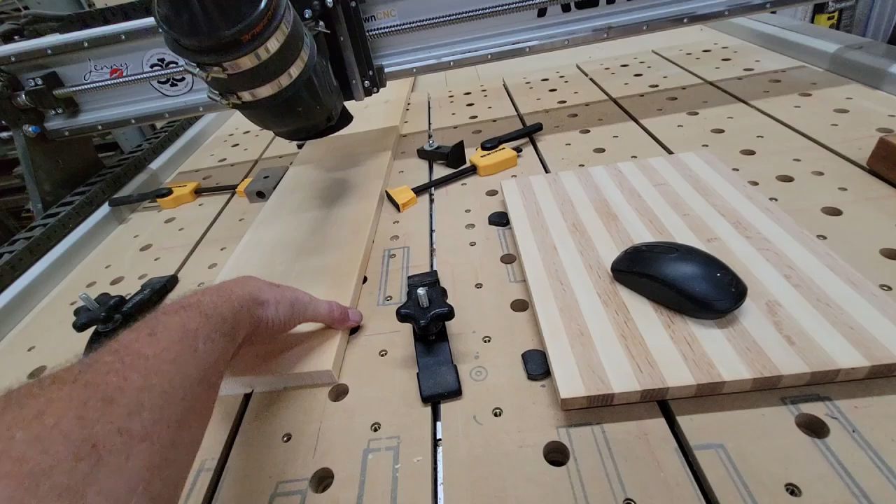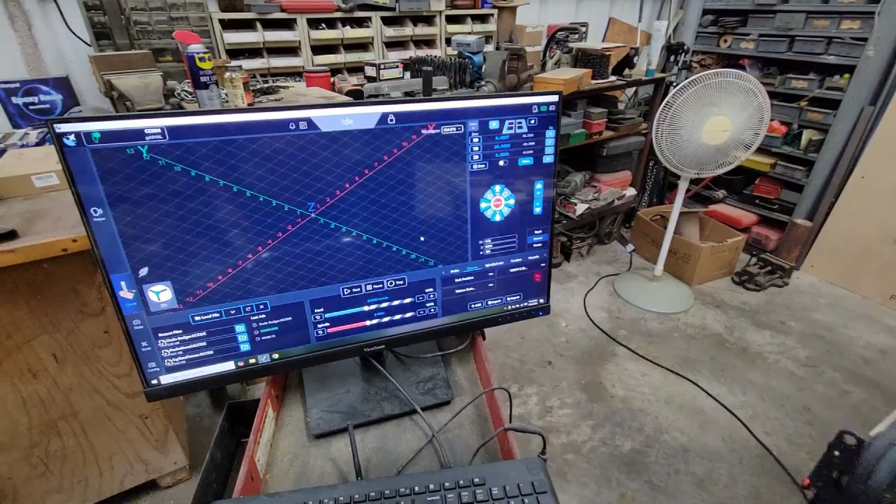The reason for that is because the tool, I just had a line drawn into the, I had a vector drawn. Let me show you in here how I did this. I really just had one long board in here, and I had just got it against these stops, set a 0 here, clamped it here and there, and then I just milled that out. It's not a big deal, and got my control right here.

Let's go back in the software and figure out why. I know what it did. As soon as it did it, I could see that I overlooked something that I should have been paying better attention, because it came in and milled this end off just like this. So that's a climb cut.

You see an end mill here to use for an example. Here's a rougher, which works good for this kind of work. So I came in here, you know, you're turning clockwise, you should be going this way. That's a climb cut. After it made that cut like that, I noticed that it went down here, and I'll go, crap, why is that doing a conventional mill cut right there? So it's doing that cut, and I know exactly what it did.

It thinks it's on the outside. I had drawn that as profile outside the line. So it was outside of this line, but it was inside of this line. That's why it made it. And I was using a 1/8 end mill that's still in here. I was using the Badger. And so it was actually on the wrong side of the line. And to fix that, you need to change your start point.

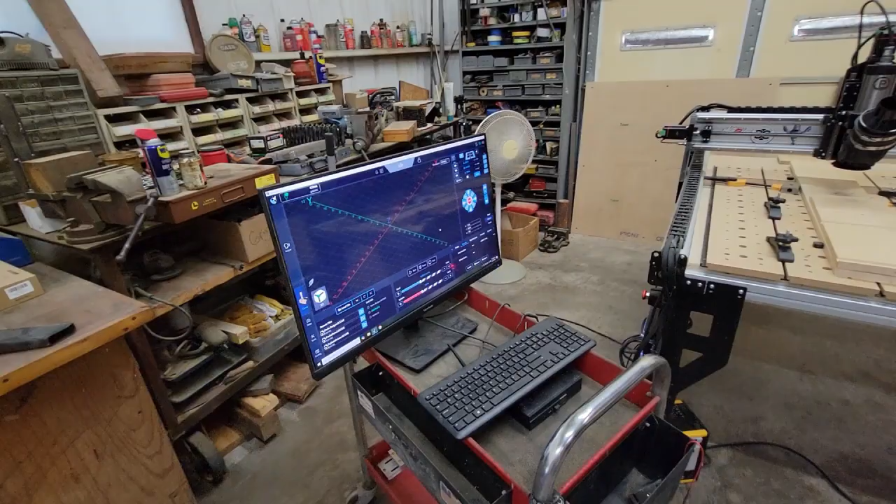I didn't even notice that. I didn't even look at it. I just didn't verify it. I was kind of in a hurry, and that's why I did that. So let's go in and look at the software. I'll show you how to fix that if you don't really know how.

And I'm going to show you how to check it before you do it and all of that, so you don't make dumb mistakes like that, which in this case, it's not a big deal. It's just a shelf that's going together, glued together. That doesn't really matter. But it could matter if you were on a more important project. Let's go take a look at that.

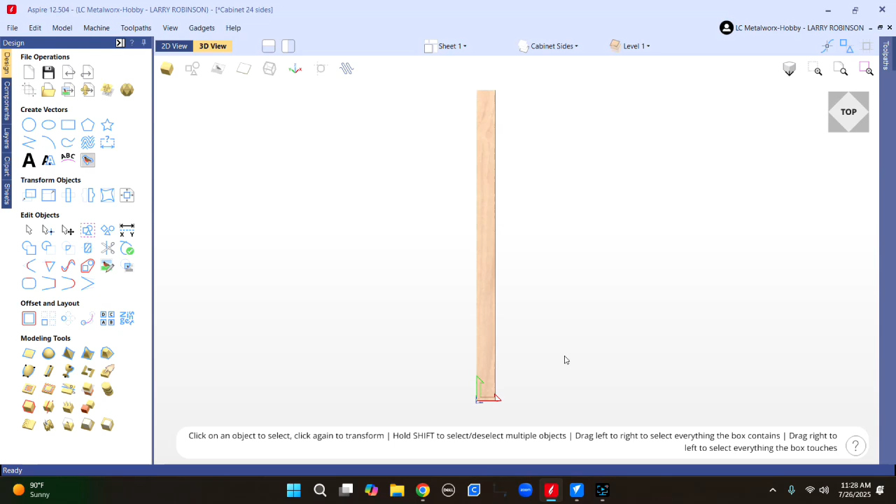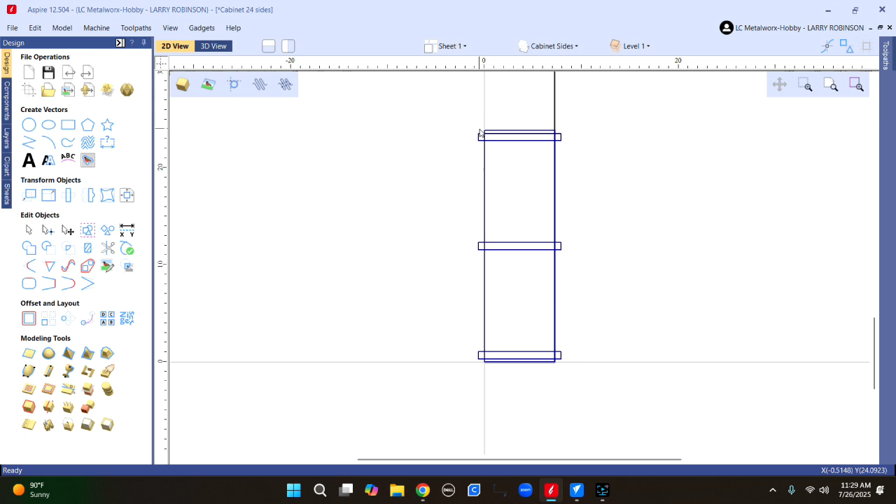All right, let's see. There's the board I had on there, and I don't like 3D view. I'm just not a fan of it. But here's basically the vectors I drew. I think I've turned off a layer here that's the mill length. But let's just go over this real fast as I can, just to show you. This is the general shape of the board I was cutting, but I didn't really use this vector for anything.

I wasn't going to mill the sides, so I just drew some lines, and this is the dados that I cut in it. Let's see what size I made these. It fit really well on this 1/8 that I was using. So I made those, you know, I lied to it about the width because I did a pocket there. 8.5 inches wide by .765 is what I milled that out with a 1/8 end mill.

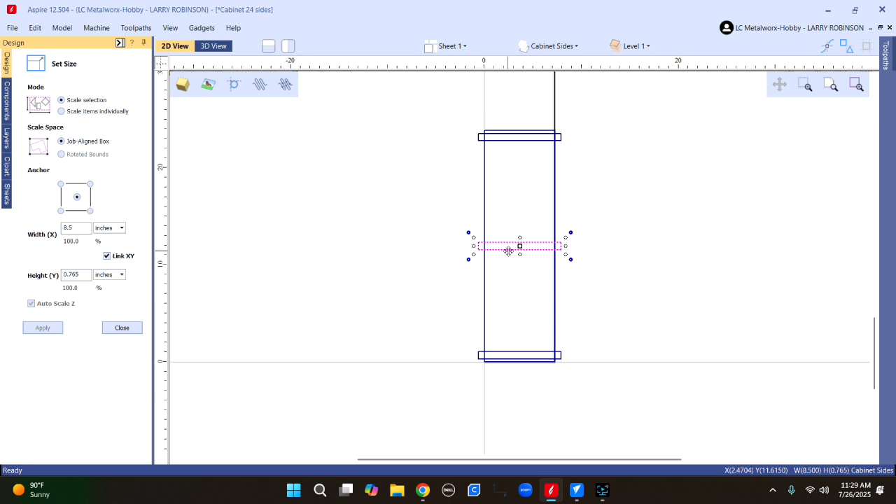And it fit just right. It wasn't super tight, but it sure wasn't loose either. So, you know, .765 to .770 would be a good number for the material thickness I'm using anyway. Just some old pine I got from probably Home Depot or somewhere.

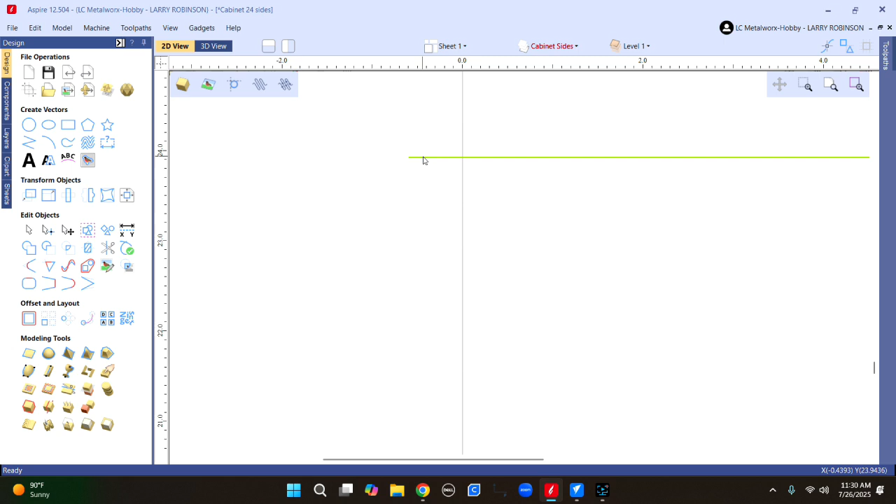Now let's turn off this so we can see the mill length here real easy that I did. So let's go over here. All I was doing is cutting that off, I was trying to use up the board length that I have, so looks like I was just going 23 and about 15/16 or something like that on length. Something like that, pretty close to 2 foot tall.

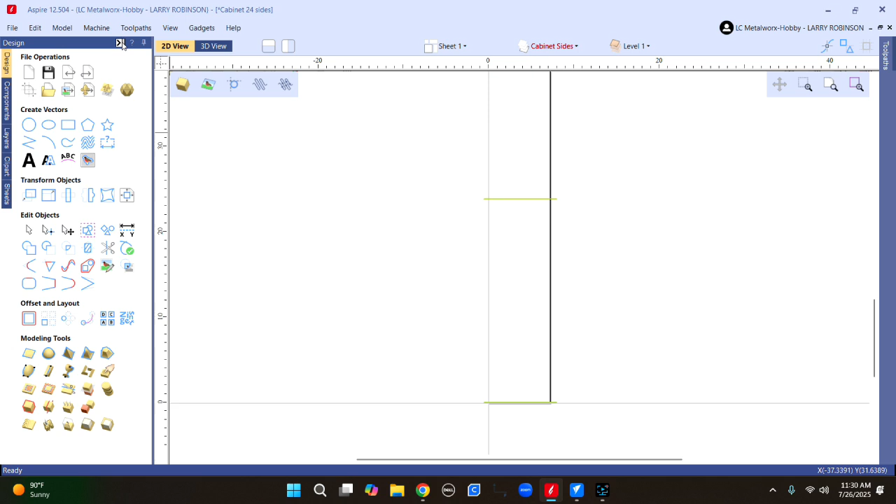And then I was just milling this off and using this same board, and then I'll move it down, and I did 2 of them. I think I have enough board to do 4 of them. But anyway, let me show you where I messed this up. So let's look over on this mill height. Now if you can see my vector, remember I told you the bottom one worked fine.

Let's look at this toolpath first. See, it's setting to a cut depth of 755, so cutting all the way through the material. 1/8 end mill. Outside, see this machine vectors, outside the line, climb cut direction. And you know, I did some ramps and stuff, but that's it. Alright, that's fine. That's what I want it to be, is outside the line.

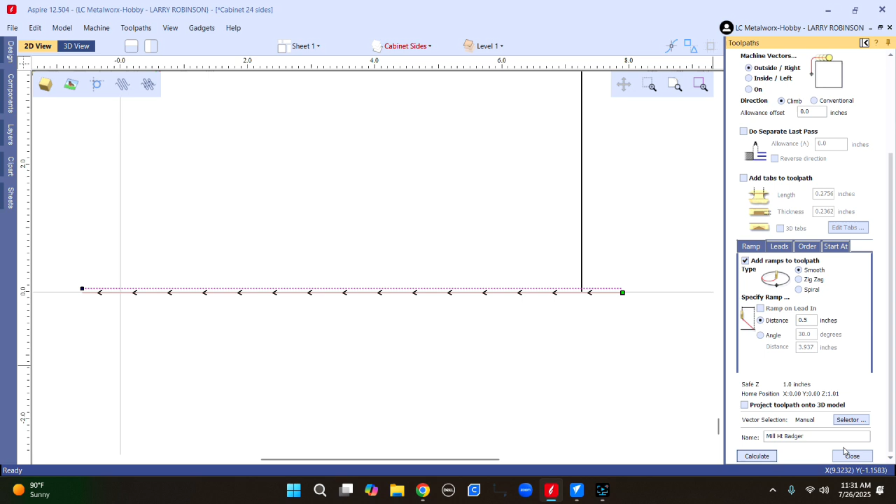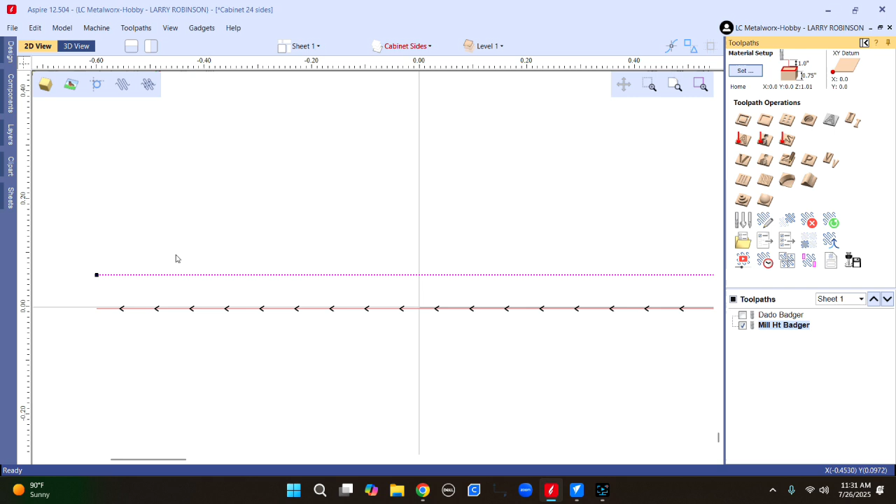Let's close that, and now you can see, because I've selected that, if you don't know, just select your vector, and in 2D you can see where your toolpath is. We're using 1/8 cutter, so it's going to be 1/16 off of that line. So you can probably see right here, about 60 thou. I think I made it to do a little extra cut there, I don't know. Anyway, so we're in the center of our tool, outside the line.

If you ever see your toolpath inside your line, you know you've messed up. That's where I messed up. I didn't look at that. And you see here, our toolpath is inside the line. That's why it cut it too small. Okay, the way you fix that, see your start point is right there.

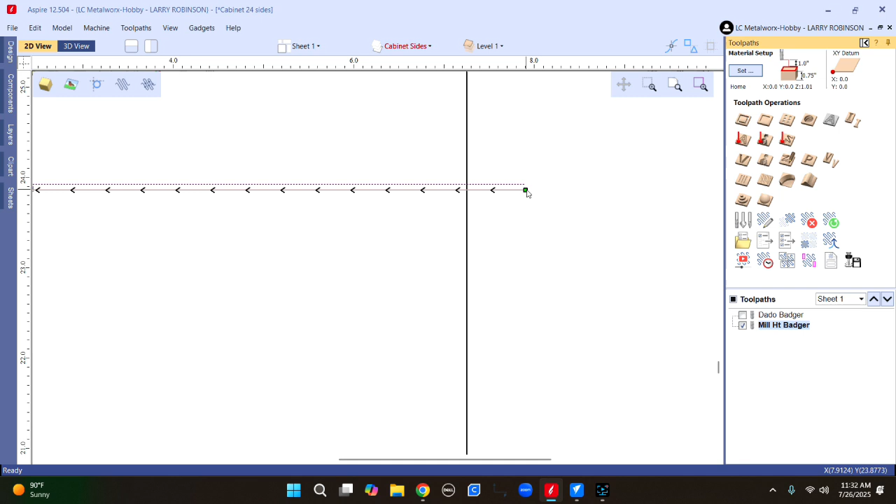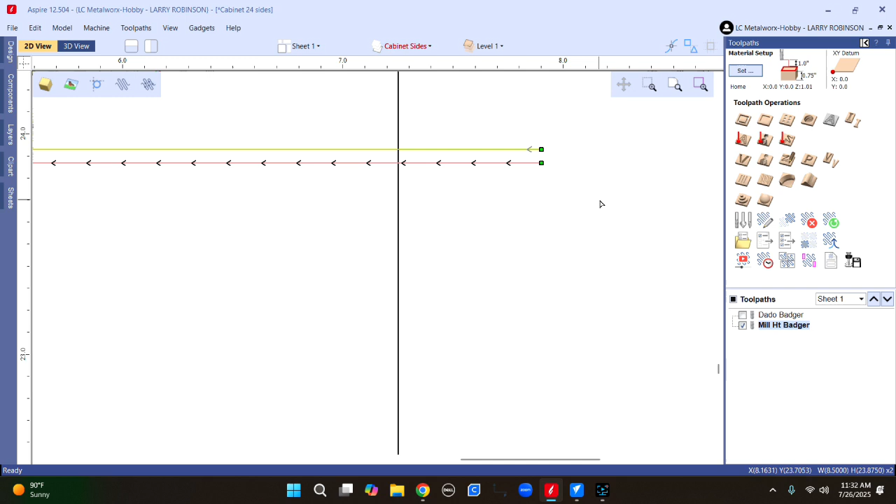So let's right click this and say move. I don't know if you can do it this way. I was going to show you. Go into node edit mode right here. Now the start point shows to be over here. Don't know why it showed that right there, but let's move our start point. Say make start point there. Just move it the opposite of what it was.

Now go in here and just go recalculate. It's just saying you have open vectors, I know that. And it says it's going to cut through material, and I know that. Now let's go in here and look at our toolpath. Go back to 2D view.

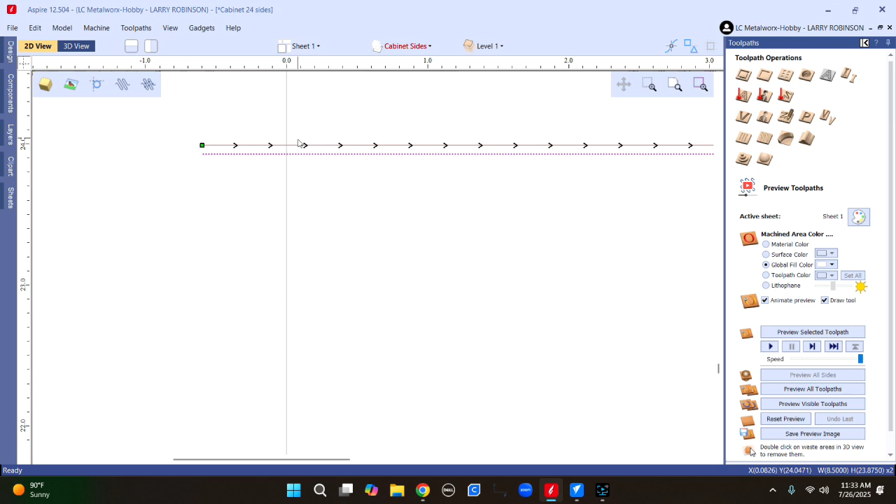And see, now we're outside of that line, and it's going to start over here with the toolpath, and it's going to go in a climb cut direction, turning clockwise, outside of that line. And I shouldn't have changed anything here. Nope. So now that's all it takes to fix that. I just didn't notice it when I did that.

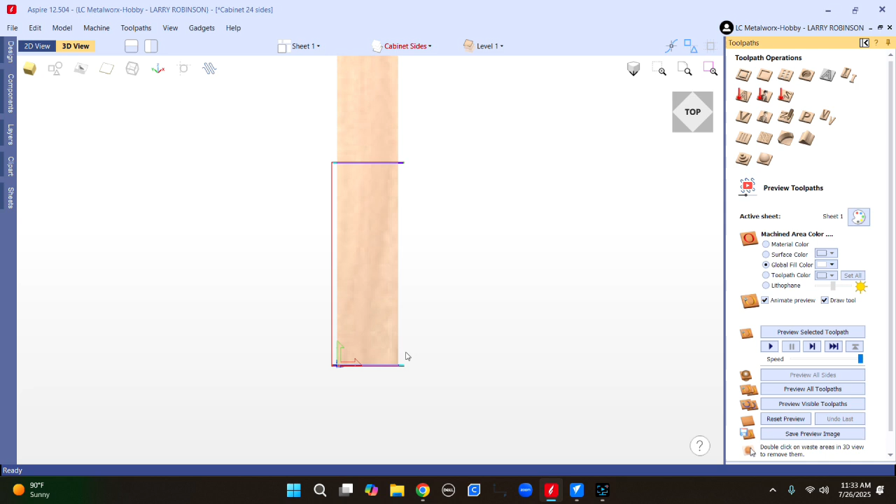You know, you probably could have simulated and also possibly seen that, even though it's kind of hard to simulate something when you're coming off of your work. It just doesn't show all of your stuff here because you're outside of your work. But you could preview this, and you know, it's hard to see that exactly.

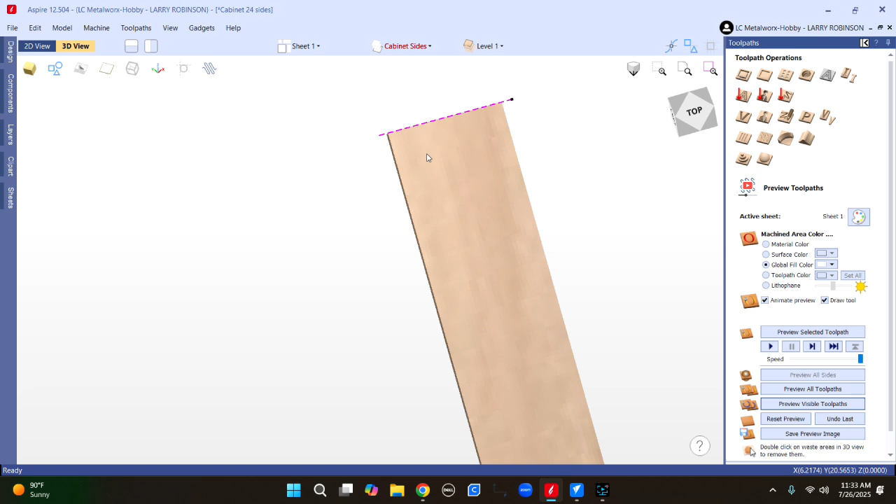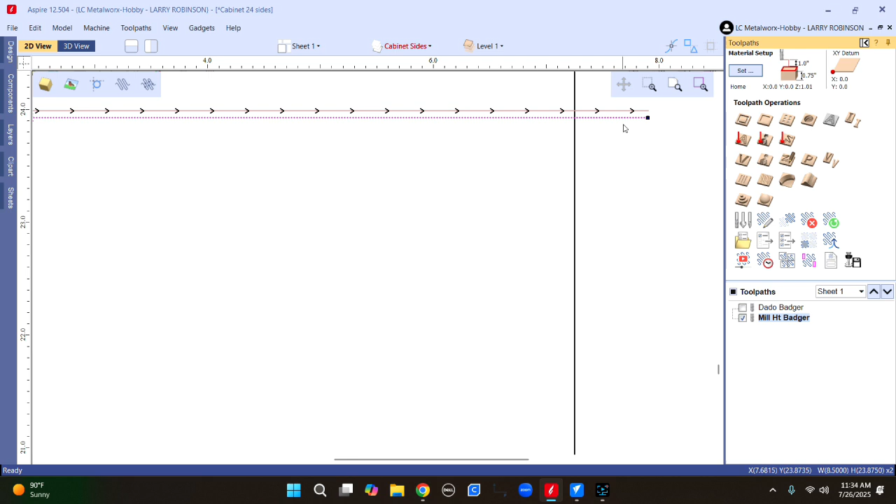Now you can draw. If you click this, you can see your vectors and see if you look like you're lined up just right there. And if I would have checked that earlier, I probably would have noticed. There's a lot of ways to verify that, but I was just showing you that the best way to verify that is to look at, not necessarily in a simulation, but just select this and look at where your tool is in relation to your vector, and you'll see that I'm outside the line, and earlier I was inside the line.

So anyway, hopefully that helps someone else that may not know that stuff, and I knew it, I just didn't do it. But change your start point in your node edit mode if you want. You know, probably the best way is to go over to push N for node editing. You can see your start point is right here, which is on your toolpath.

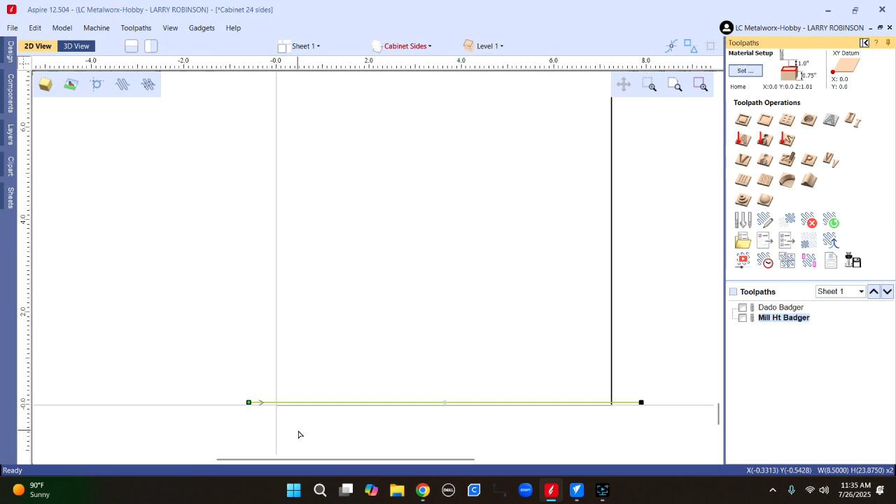That would turn off toolpath, and it shows the start point over here for some reason. And I don't know why that is. You would think your start point is here, but I don't know what that is exactly. I just know to change it opposite of what it was, and then it will fix that problem. Oh, I got to get back over here. Push the N to turn node editing off.

And so that shows your start points when you're just looking at it. But start points are opposite of what you would think they are on your toolpath. So for whatever reason, it doesn't matter. Just change them to the opposite, and it'll start from the opposite direction.

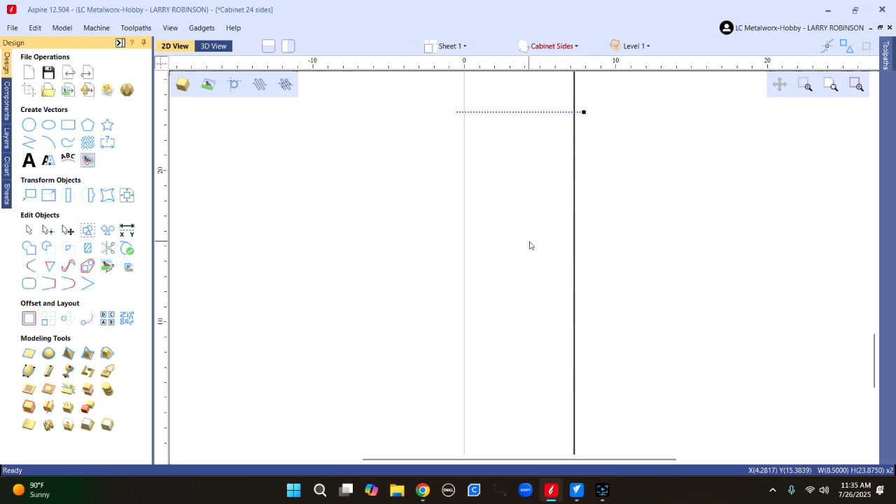And always make sure that you're clear of any clamps or anything like that when you're doing cutting like that. When I'm holding down with clamps, I rarely do that, but on quick stuff like this, where you're just cutting something off, clamps can work. Just be sure you know where they are and that any of your rapids are not going to be hitting clamps. And I already studied that when I did this.

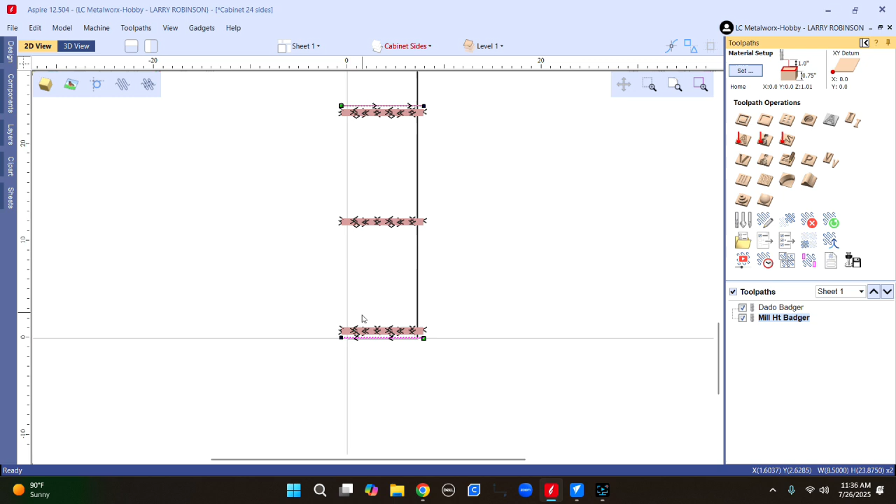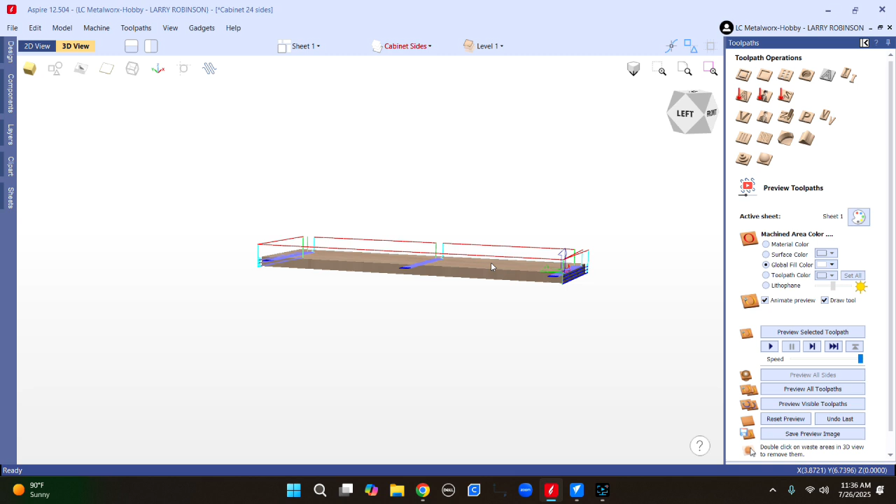I had already known where my clamps were. You can look at the rapid moves here, see where they're at. And they are moving like this on that dado work. So they are in the way of a clamp here. So if you'll notice, I had them picked up to 1 inch high and my clamps were only about 1/2 inch. So I knew they would come up over the top of the clamps.

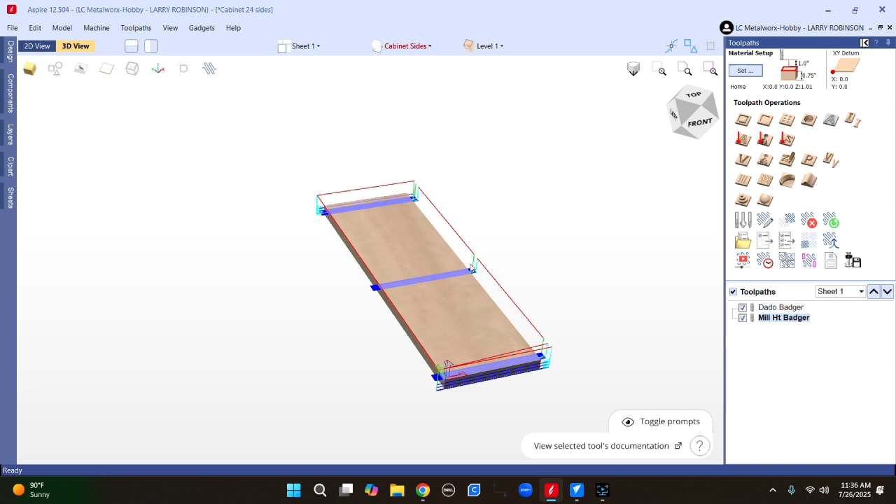Same way with your dust boot, make sure your dust boot is also clearing those places, and you can look in your G-code or even look at these positions and you can see all that. You'll notice anywhere you put this, you can normally see that. Anyway, see right here in your material setup, you can go in here and change how high you're lifting.

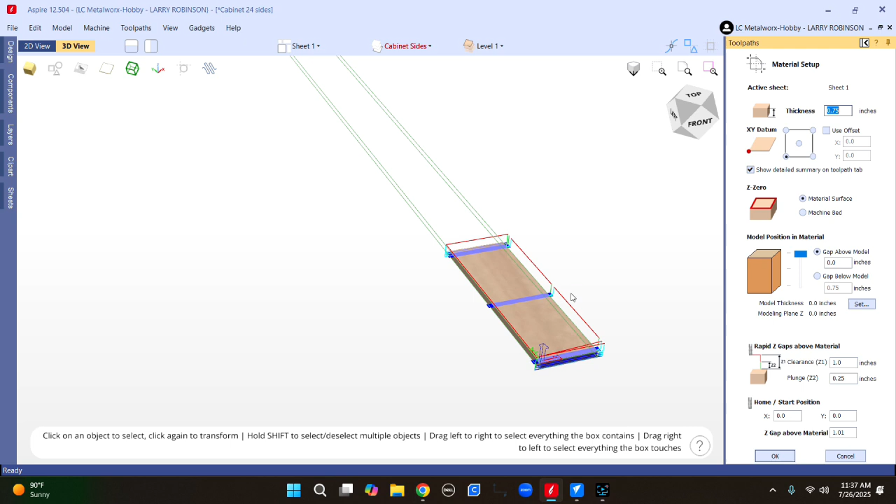I'm lifting at 1 inch here on my rapid moves, and then 0.25 means every time it makes a cut, it's going to approach down to 1/4 inch. So it's going to go over here, come down to 1/4, then start the ramp, or the next move will come down to 0 and all that. So you can see how that's going to ramp down, how I had the ramp set. And as you can see, it was right outside the material.

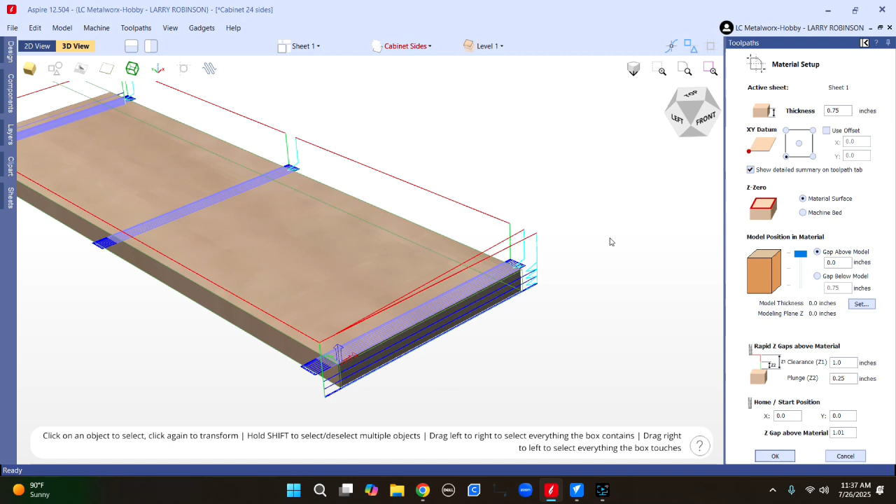That's not exactly accurate, but see right there, I was ramping down before it hit material. That's the way I wanted to do it. So anyway, it's pretty cool. You can look at stuff like this and be sure you know what's going to happen.

So now that I've fixed that, I'm going to go in and just push File, Save As, because I don't want to save this as a 3D file. I'm just saving it as a VCarve file, and I'll save that in the same place it was, and I'm done with that.

Alright, thanks for watching this. I just wanted to clear that up in case anyone else has any of those issues.